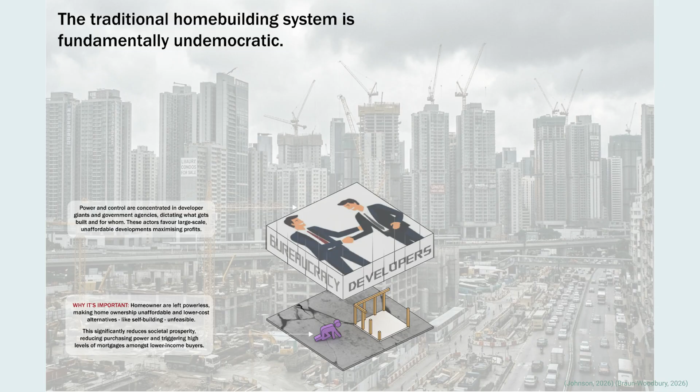This gap exists because the traditional home building system is fundamentally undemocratic. Power and control are concentrated in developers and agencies that favor large-scale developments. This leaves homeowners powerless with multiple macroeconomic effects. So, what is democratic housing? Democratic housing is when individuals have access to high quality housing that satisfies missing middle goals, is unhindered by exclusionary zoning, and is low cost and affordable.

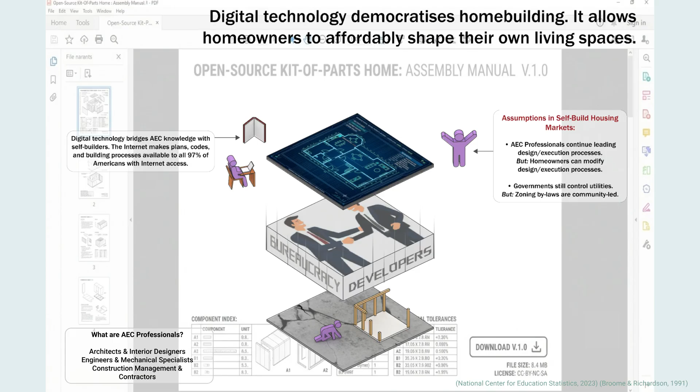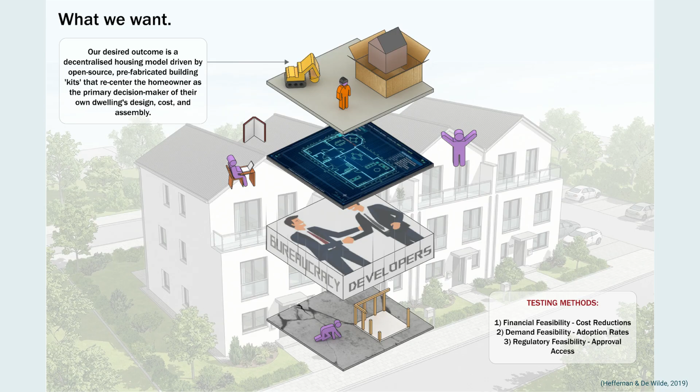Our proposal is that digital technology democratizes home building. Open source architecture plans, uploaded to the internet by AEC professionals, are available to 97% of Americans with the internet. We assume that AEC will still lead design, but that homeowners can modify the design and the execution. Our desired outcome is a decentralized housing model driven by open source, prefabricated building kits that recenter the homeowner as the primary decision maker of their dwelling's cost, design, and assembly.

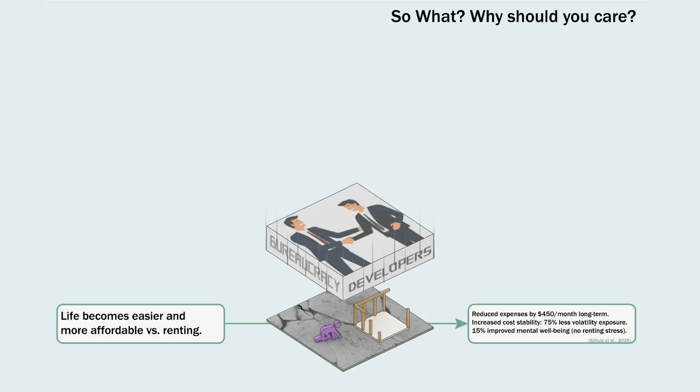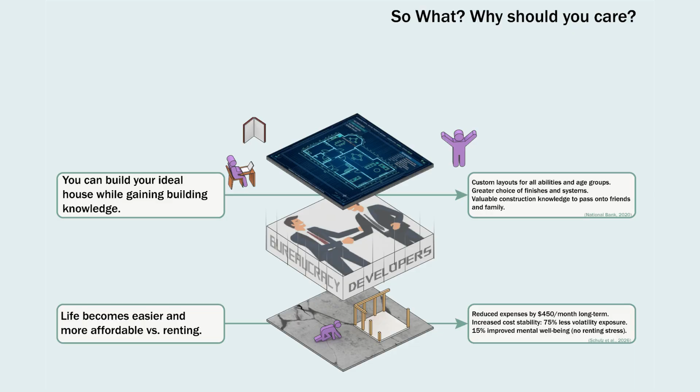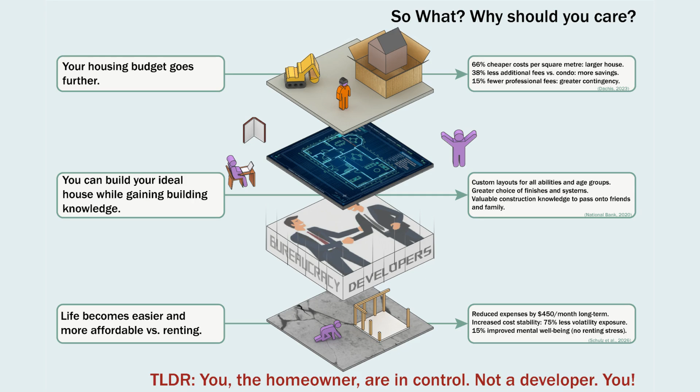So, why should you care? Well, a democratized homeowner-led housing system makes life easier and more affordable versus renting. Also, you can build your ideal house while gaining building knowledge, allowing for custom layouts for all abilities, a greater choice of finishes and systems, and valuable knowledge sharing. Also, it makes your housing budget go further, as it allows for cheaper cost per square meter, less additional fees, and fewer professional fees as well. In other words, it allows you, the homeowner, to be in control.

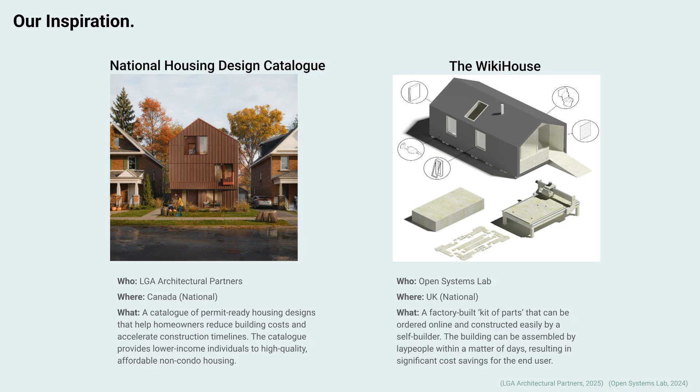So, our inspiration comes from the National Housing Design Catalog of permit-ready housing designs in Canada, as well as Open Systems Lab's WikiHouse, a factory-built kit of parts for self-builders in the UK. This approach of democratizing home building brings more control to those who currently have very little. Those such as low income families, persons with mobility issues, and senior citizens, along with others, can use this to gain more control over their home building.

Architects and designers can also be winners here, with opportunities for tax benefits and grants, great publicity, and a novel approach to the creative process. Although developers may seem like the loser, they don't have to, as they can still resell land, selectively provide utilities, and be a labor provider. Location is another primary factor in the implementation of democratized home ownership. An area such as the Greater Detroit area brings together important factors such as a growing city, a high distribution of low income, and land that is in need of current development.

So, our first test is seeing whether open source and self-build platforms lower building costs. So, we're going to play a little bit of a simulation game here where we pit the self-build costs versus traditional construction costs. So, let's get cracking. So, the first two variables being added are direct costs and financial risks. And these variables will be uncovered through simulation, where AEC professionals will be contacted for quotes, and through modeling to see how delays and inflation impact the financial risk costs.

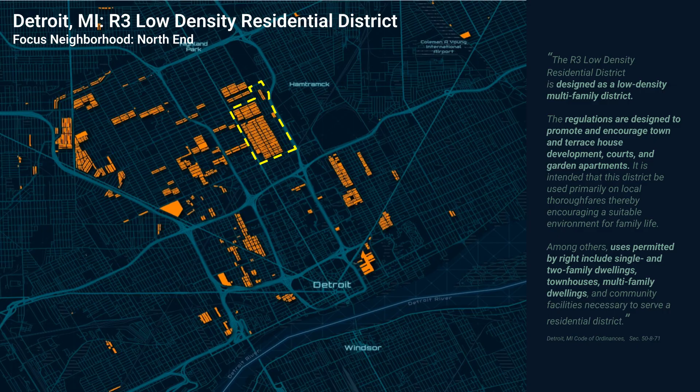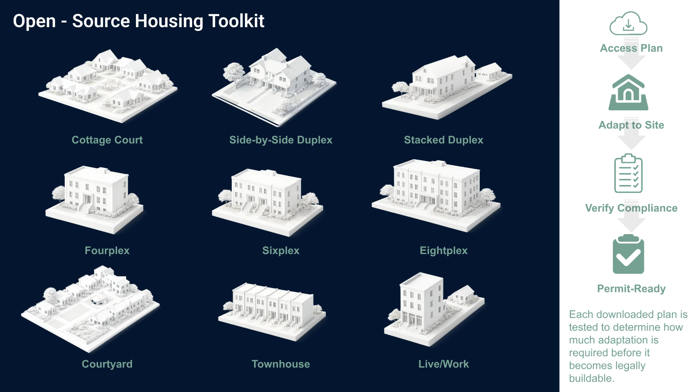To keep the comparison consistent, every case study is located within Detroit's North End and R3 low-density residential district. By holding the neighborhood, zoning regulations, and permitting process constant, we can focus on how differences in the site itself influence buildability. Each site begins with the same open source housing toolkit. Rather than creating a custom design, a housing typology is selected based on the site, adapted as needed, and evaluated to determine what changes would be required before it can move through the approval process.

We also identify the people involved in that process. While homeowners can access the plans, architects, engineers, city reviewers, and utility providers all play a role in adapting the design and moving it toward construction.

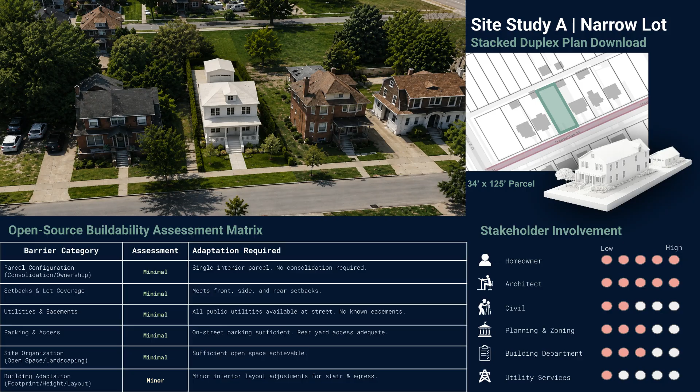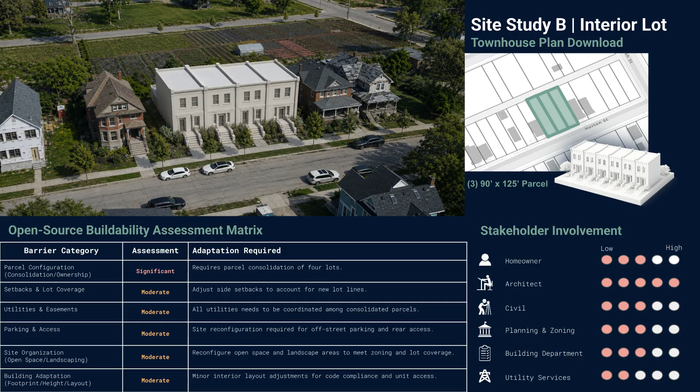Our first case study pairs a stacked duplex with a narrow interior lot. Because the site already aligns well with the selected housing type, only minor adaptations are anticipated, making it our baseline for comparison. The second case study places a townhouse development across multiple interior parcels. Parcel consolidation, utility coordination, and site planning introduce additional complexity, allowing us to evaluate how these conditions affect the level of adaptation required.

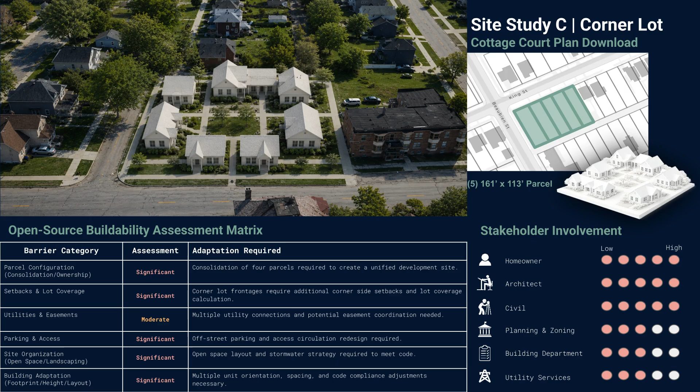Our third case study tests a cottage court on a multi-parcel corner lot. This scenario introduces the greatest number of anticipated adaptations, including setbacks, circulation, open space, and utility coordination, making it the most complex site in the study. Our final case study returns to a standard interior lot with a side-by-side duplex. Like the first site, the parcel is already well suited to the selected housing type, resulting in relatively few anticipated adaptations.

The anticipated adaptations from each case study are compiled into our open source buildability assessment matrix. Each site is evaluated using the same barrier categories, creating a consistent framework for comparing buildability across different site conditions. Rather than predicting permit outcomes, the framework provides a repeatable method for identifying where additional coordination and design adaptations may be required.

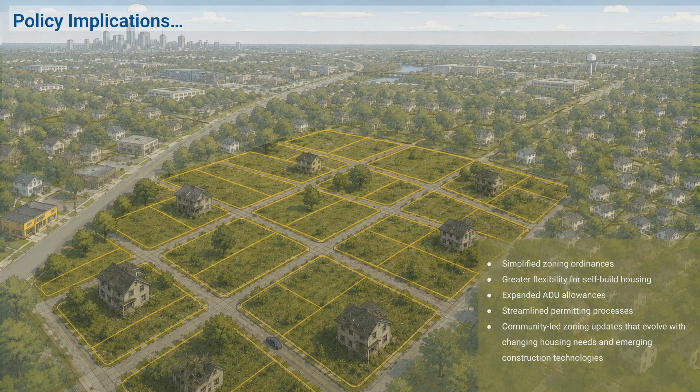If our hypothesis is correct, the research suggests that open source architecture alone will not solve housing affordability. Lasting change also depends on policies that support homeowner-led development. From a policy perspective, this research points towards simplified zoning, streamlined permitting, and greater flexibility for self-built and modular housing as important steps towards expanding access to homeownership.

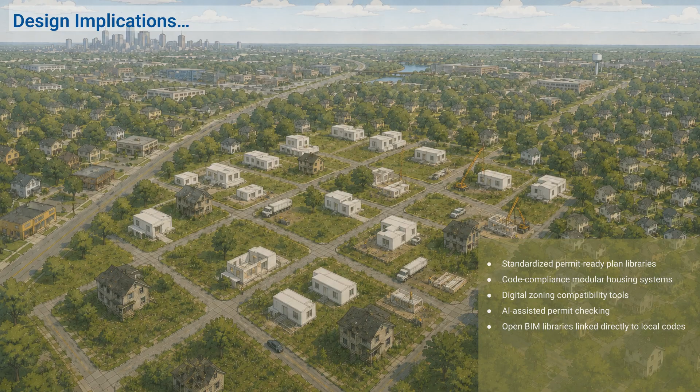For designers, the findings encourage standardized permit-ready housing systems, digital code compliance tools, and modular construction methods that make professional design more accessible without sacrificing quality. More accessible housing also creates broader social benefits by increasing homeowner autonomy, reducing dependence on large developers, improving affordability, and creating neighborhoods that are better able to adapt over time.

Technology can democratize access to architectural knowledge, but housing only becomes truly democratized when institutions evolve alongside it. By combining open source design with supportive policies and professional expertise, we can begin creating a housing system that gives homeowners a greater role in shaping the places they live.